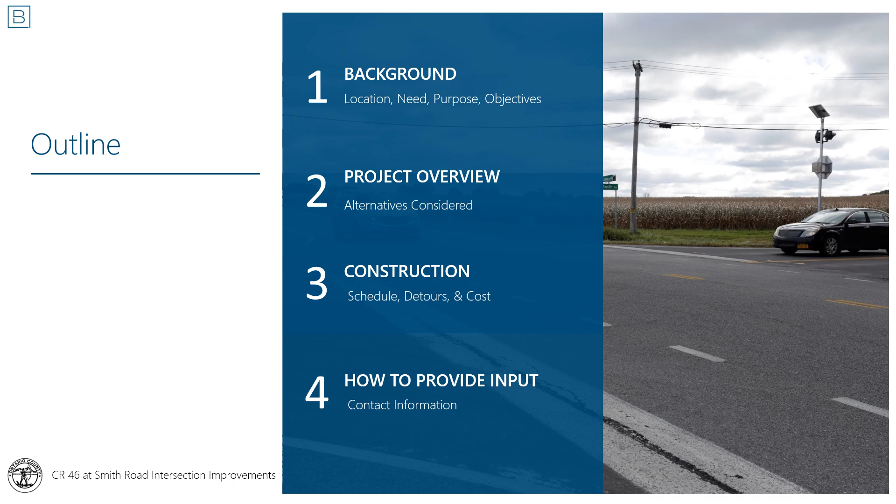Ontario County has studied its two-way stop-controlled intersections using crash data spanning the years 2008 through 2018. The intersection of County Road 46 and Smith Road was identified as an intersection experiencing more crashes than similar locations around the county. Ontario County sought and secured Federal Highway Safety Improvement Program funding in 2018 with the goal of improving safety by reducing the number and severity of crashes.

County Road 46 and Smith Road intersect to the east of the city of Canandaigua. County Road 46 is owned and maintained by Ontario County, while Smith Road belongs to the town of Hopewell. The county government complex is located just 3/4 of a mile east of Smith Road off County Road 46. County Road 10 lies to the west. U.S. Route 20 and New York State Route 5 are to the south, and County Road 4 is to the north.

Both roads are generally straight and meet at a 90-degree angle. The Smith Road approaches are controlled by stop signs, while vehicles on County Road 46 have the right-of-way. Travel lanes on County Road 46 are 11 feet wide, and the shoulders are 4 feet wide, which is typical of many county roads. Travel lanes on Smith Road are just over 10 feet wide, and shoulders vary from 2 to 3 feet wide.

Ontario County installed reflective strips on signposts, added solar powered flashing beacons to highlight warning and regulatory signs, and added new pavement markings to the intersection as interim measures in 2018, after completion of a formal safety assessment.

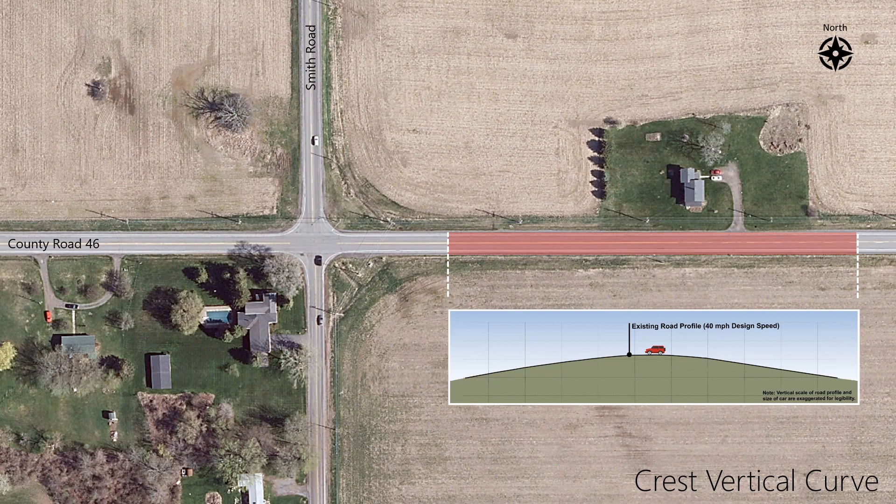Unfortunately, severe crashes have occurred at the intersection and continue to do so. As part of the design process, Ontario County completed an updated crash study. Nearly three-quarters of the crashes that occurred between January 1, 2013 and November 30, 2019 involved a right-angle collision. Police reports suggest failure to stop or failure to yield the right-of-way are contributing factors.

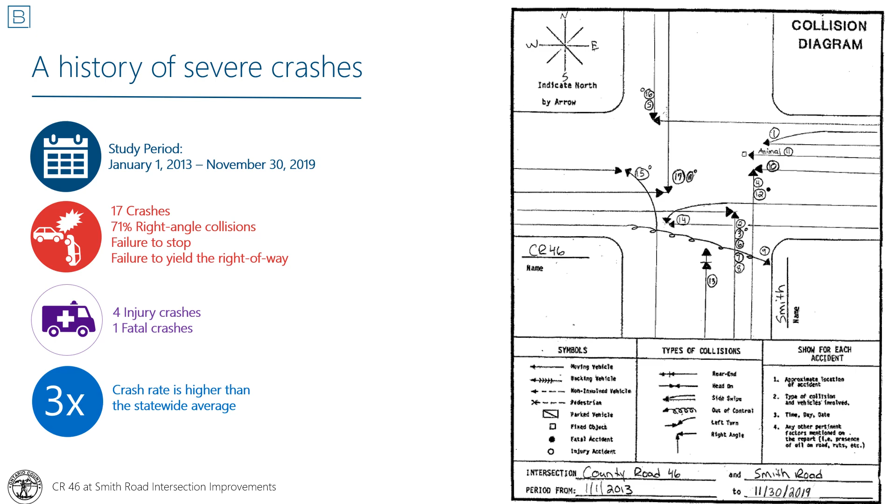4 of the crashes resulted in at least one personal injury. 1 claimed a life. A collision diagram was drawn to illustrate how and where the crashes happened. Given the straight line approaches, relatively high vehicular speeds, features that limit sight distance, traffic volumes, and a demonstrated history of severe right-angle crashes, Ontario County is progressing this project to enhance safety at the intersection.

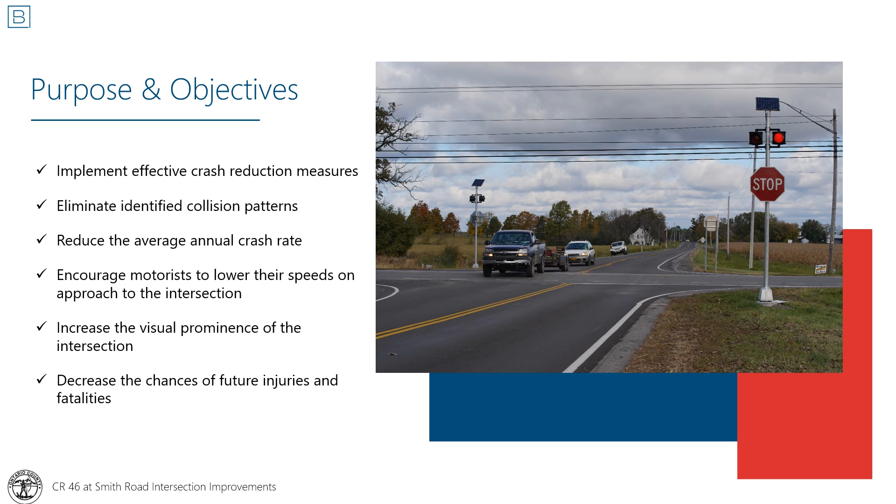The objectives of the project are to mitigate the identified crash patterns and reduce the average annual crash rate to a level at or below the expected for similar locations, and to implement a treatment that encourages motorists to lower their travel speeds upon approach to the intersection, thereby decreasing the potential for a high-severity crash if one does occur. The county's design team considered multiple ways to achieve these objectives.

The no action or null alternative would retain two-way stop control at the intersection of County Road 46 and Smith Road. Only routine pavement maintenance, along with periodic replacement of pavement markings and signs, would be done. This would not improve safety at the intersection.

Alternative 2 would install yellow signs with the text "Cross traffic does not stop" facing Smith Road. County Road 46 would get a new painted median to highlight the intersection while narrowing the travel lanes to approximately 9 feet. Rumble strips would be cut into the pavement along the edges of the median and the shoulder to encourage motorists to slow down and remain in their lane.

Most crashes at the intersection involve a right-angle collision. Many vehicles stop on Smith Road but fail to see or properly react to an approaching vehicle. The crest vertical curve to the east may be playing a role in some of the incidents. While this treatment could draw drivers' attention to the intersection and help in the near term, simply highlighting the intersection's location is unlikely to reduce the number of crashes.

New signs and markings could lose their effectiveness over time as people get used to them, especially given the high proportion of familiar local drivers in the area. Noise and vibration from rumble strips could be a nuisance for adjacent residents. Ontario County is committed to implementing a proven long-term safety treatment at this intersection. Therefore, this alternative was dismissed.

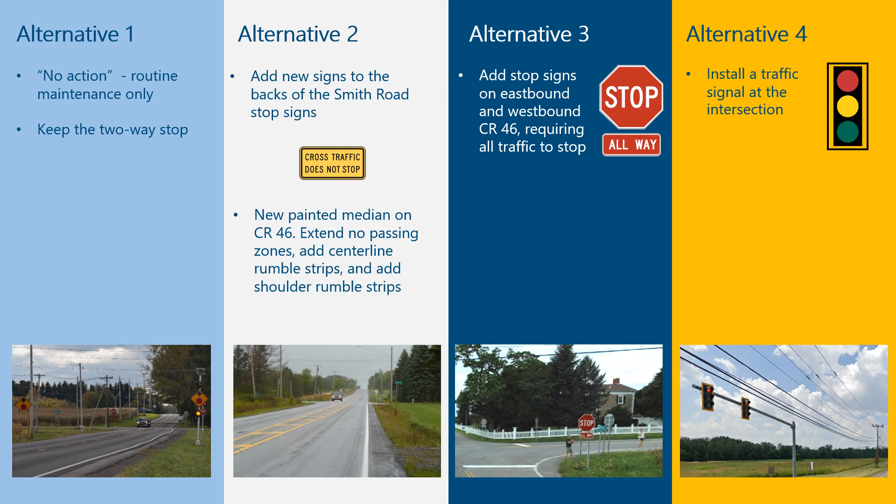Alternative 5, Ontario County's preferred solution, would transform the intersection of County Road 46 and Smith Road into a roundabout, similar to those found nearby on County Road 10. This geometric intervention would physically eliminate the potential for high-speed right-angle collisions by prohibiting left turns and crossing movements. The number of potential vehicular conflict points would be reduced from 32 to 8.

The Federal Highway Administration estimates that a roundabout could reduce the total number of crashes at this location by up to 72%. Crashes at roundabouts are less likely to result in a serious injury as they generally involve low speeds and low angles of impact. This alternative would be highly visible from all intersection approaches.

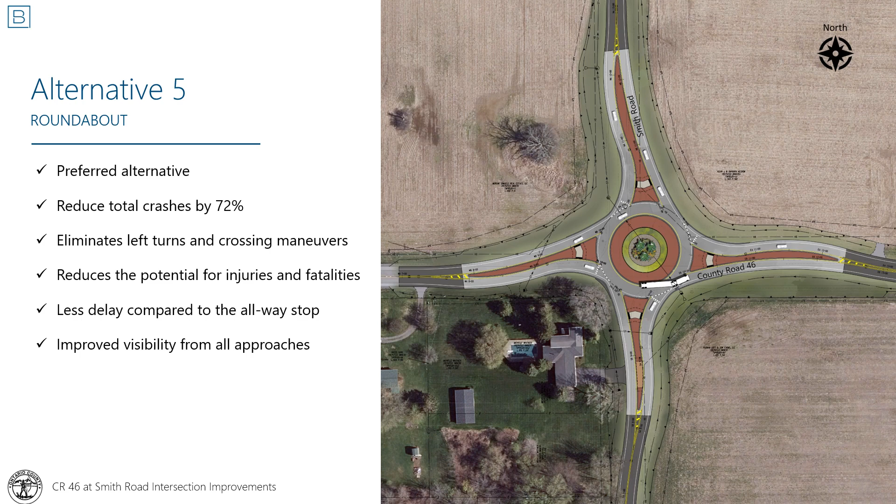The new roundabout would have a diameter of 140 feet. The 18-foot wide circulatory roadway would be striped with a single 16-foot wide travel lane, which is typical of other roundabouts across Ontario County. As with all roundabouts, entering traffic would yield to vehicles already within the circulatory roadway.

The design team looked at several options for placement of the circle during design, ultimately deciding on an option that avoids impacts to nearby residential properties while limiting the amount of new roadway built off alignment and adjacent farmland.

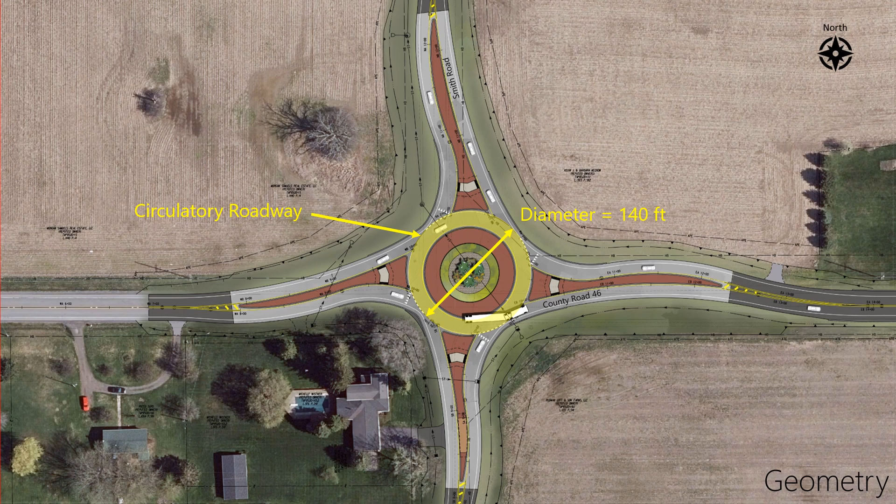The intersection would accommodate tractor-trailers and farm equipment. Trailers might ride up on the concrete truck apron or use an asphalt shoulder extension to complete their turn. Buses and emergency vehicles would be able to navigate the roundabout without using the aprons. Portions of the raised splitter islands would be made flush to facilitate access to private driveways and to accommodate the occasional pedestrian.

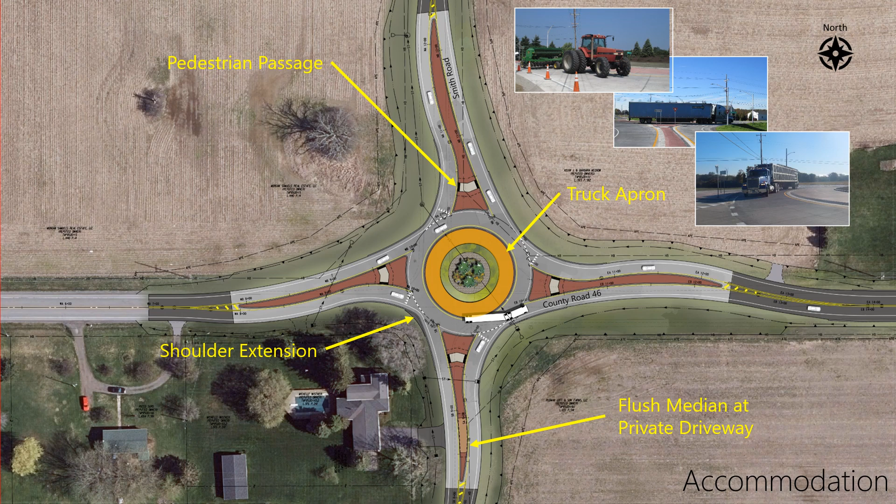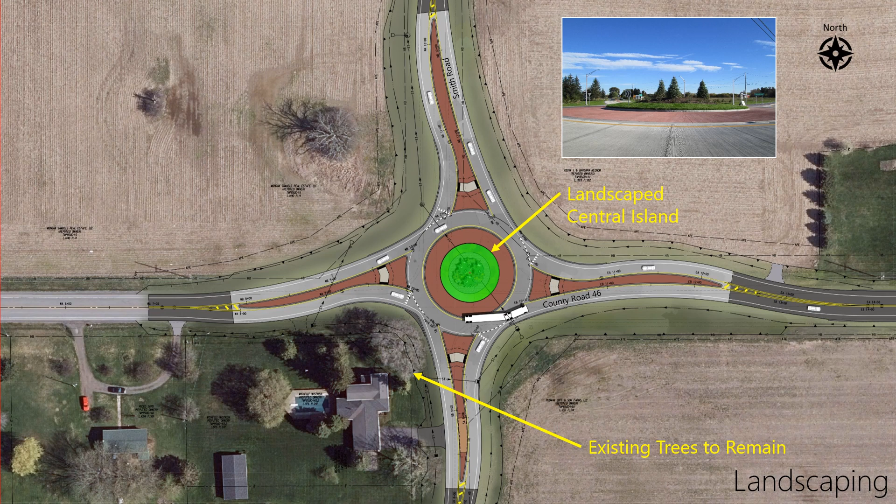The central island would be mounted 3 feet high to focus a driver's attention on vehicles approaching from the left. It would be covered with a low-maintenance mix of grass, stone mulch, and plantings to make the new intersection both attractive and visible.

The crest vertical curve east of the roundabout on County Road 46 would be lowered, providing adequate stopping sight distance for vehicular speeds of up to 60 miles per hour. Segments of Ontario County's granite traversable curb would be installed along the roadside to avoid substantial earthwork impacts to the residential property to the north and a buried water line to the south.

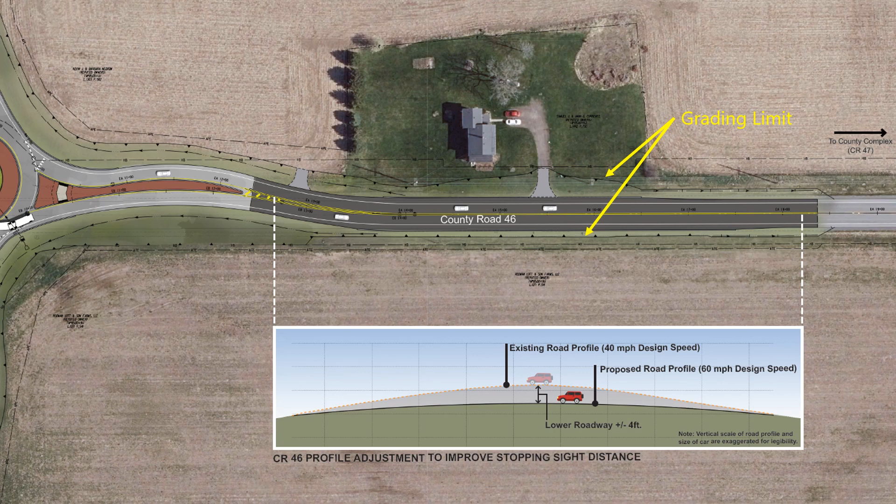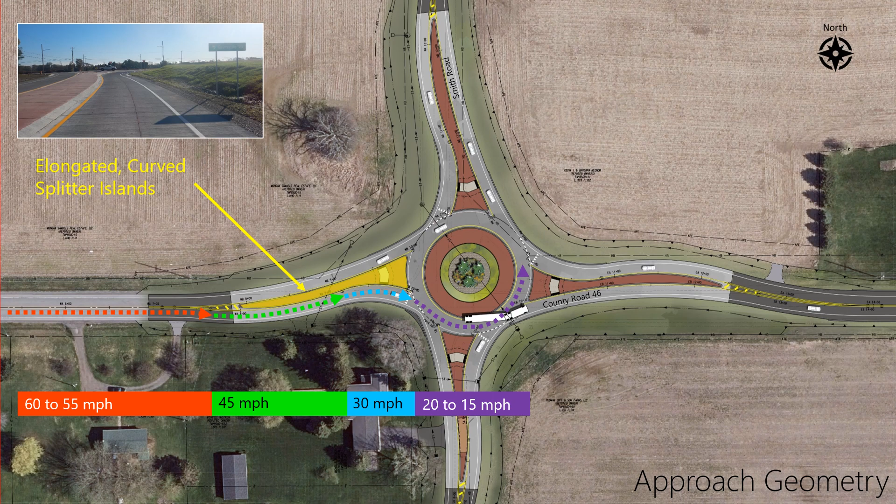The roundabout would feature relatively flat slopes leading away from the pavement, enhancing overall safety. While some storm water would be captured in specially engineered swales designed to allow for infiltration, runoff from rainfall or snowmelt would be carried away from the intersection by a system of swales, ditches, and pipes. Rather than depositing storm water onto adjacent properties, the system would carry it north.

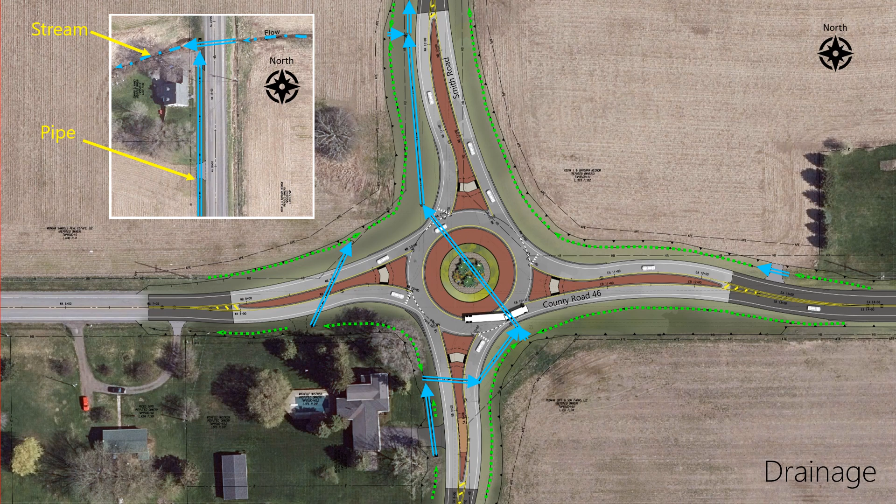A new pipe would carry the storm water north along the west side of Smith Road within the existing right-of-way and outlet to an existing stream.

Ontario County has constructed 4 roundabouts and will see its 5th built in 2020. We understand that adding lights in rural locations is a big change for those that live nearby. We've reviewed the design and performance of our roundabout lighting systems after each successive project, continually looking for ways to improve and to limit their impact.

Light poles would be set well behind the edge of pavement, reducing the chance of being knocked down. Each arm would be at least 15 feet long and the lights would be mounted 24 feet above the pavement. The lighting would not be as bright as what you might have seen at the intersection of County Road 8 and County Road 41, or even along County Road 10, but it falls within the accepted engineering and safety guidelines.

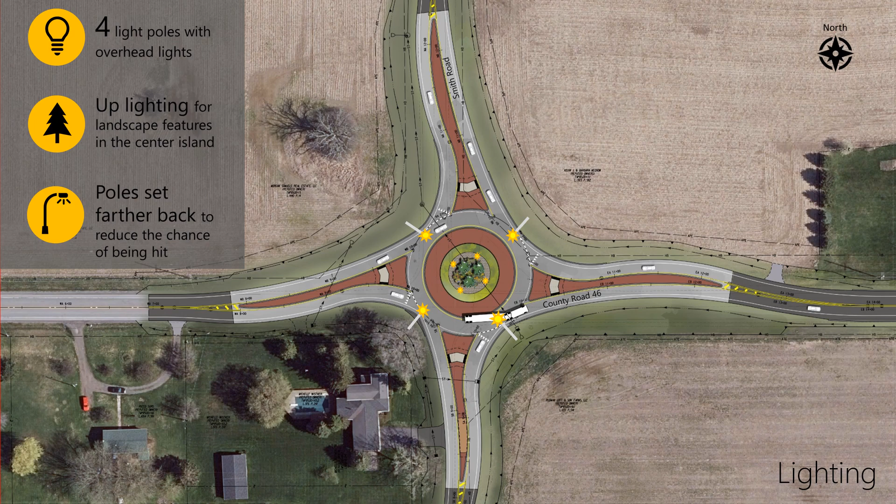County Road 23 was the county's first roundabout to have perimeter lighting supplemented with landscape lighting in the central island. The landscape lights illuminate trees in the middle of the roundabout. This helps drivers recognize that they are approaching a different kind of intersection without requiring substantially brighter overhead lights. So far, the county and adjacent residents have been pleased with the system's performance. This feature will be replicated at the new County Road 28 and Shortsville Road roundabout, and we anticipate using the same design for County Road 46 at Smith Road.

The project would require 3 permanent easements, shown in yellow, and 2 temporary easements, shown in blue. Permanent easements would accommodate the realigned roadways, grading, drainage, and relocated utilities. Temporary easements would be needed to facilitate grading during construction, and these areas would be restored in kind at the end of the project. Ontario County has begun to personally reach out to affected property owners.

Owners should also expect to be contacted by the county's real estate experts in the coming months. All acquisitions will follow the provisions of the Uniform Relocation Assistance and Real Property Acquisition Act of 1970 to ensure compliance with federal law and fair compensation.

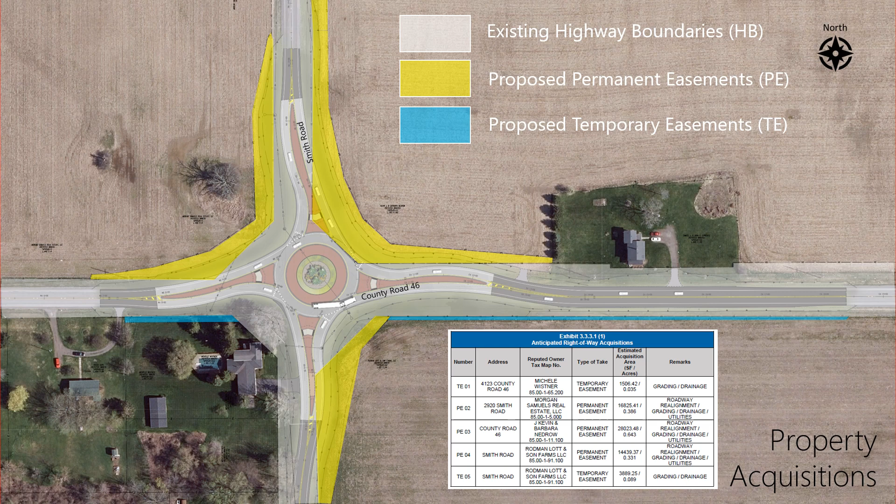Now let's spend just a few moments discussing the anticipated construction schedule, detour plans, and estimated cost. Preliminary design began in 2019 and public documents have been made available online for review and comment. After all comments have been received and addressed, Ontario County will begin development of detailed plans and specifications in the summer of 2020. The project should be advertised for contractor bidding by early 2021.

Public utility relocations, including overhead electric, telephone, and cable, should also take place in early 2021. Construction is planned to start in the spring of 2021. However, the intersection would remain open to the traveling public until area public schools close in late June. At that time, the contractor would be allowed to close the intersection to all traffic with posted detours. They would need to complete all grading, curb, roadway, lighting, signing, and marking work prior to the start of the next school year in September 2021.

Past projects have proven that allowing a contractor to fully close the intersection allows for faster construction, minimizing disruption to the traveling public, and a higher quality product. Landscaping and finish activities would be completed with traffic routed through the new roundabout in the fall of 2021. Items critical to maintaining this schedule include completion of the property acquisition process, obtaining necessary approvals from the New York State Department of Transportation, and the completion of private utility relocations.